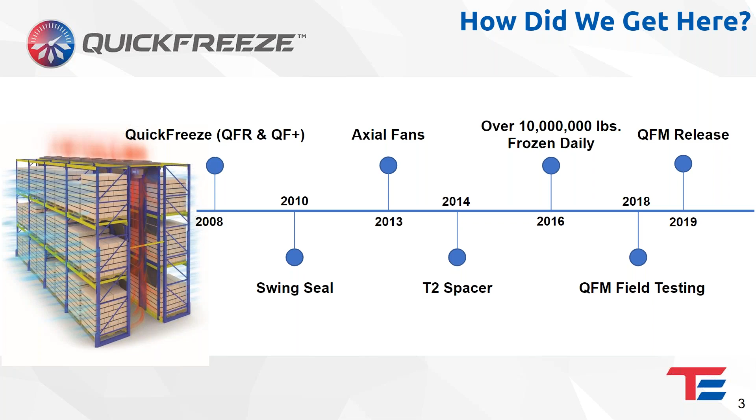So here's just a quick video graphic that shows the existing QuickFreeze offering that we've offered for the past 12 years. It shows the array of pallet heights. You can mix pallet heights in the same system, and it shows the operation of the swing seal at the top. Notice when that pallet is engaged,

it deflects that gate and blocks off any space above while providing open space for these spacers to breathe. So you can see we bring air in from the aisle. It's induced through the pallets because we have fans exhausting off the top of that plenum space. And then we can see through this wall—we just left it transparent for the video, but that would all be sealed off. So we're creating a reduced pressure plenum. And then when you push pallets up against the opening, the only pathway for the air is exclusively through the spacer area. And that's why we get the kind of performance we get with the QuickFreeze.

QuickFreeze really is universally accepted in the industry as the fastest way to freeze palletized products. So at any given temperature, this is the fastest technology available for palletized product.

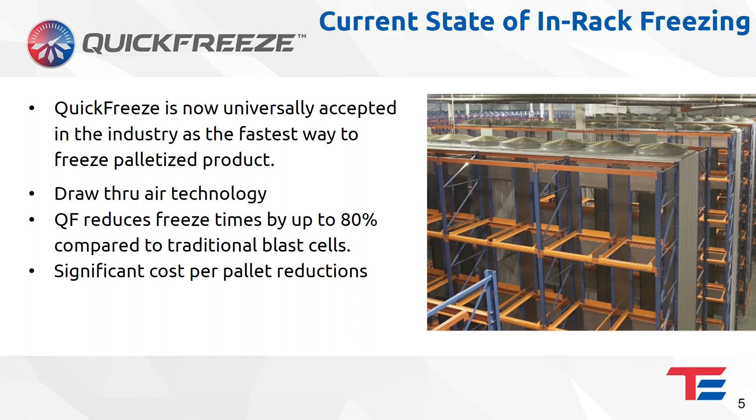Over the past 12 years, we've really learned a lot about how people utilize the systems, and we wanted to offer a new offering that helped overcome some of those challenges. We really feel like we've done a great job with our QFM offering.

Some of the things that we really wanted to address in this was number one, lead time. The time it takes to build a blast cell or build out a QuickFreeze system could take many months, up to a year, to really go from the day you decide that you want to start freezing to having that system installed and running. That can be a long lead time.

There was also, with QF Plus and with QFR, a problem of vacant pallet position, where if you don't have all of the pallet positions in a zone filled, you'll see reduced performance on the remaining pallets in the system. We knew that if we increase the CFM per pallet, it would increase the performance, but it amplifies the vacant pallet position problem. So we wanted to figure out how to address that.

Finally, when people went from blast cells to QF Plus, we saw a significant reduction in handling time, and some of our users were able to get away from batch rotation of the products, but there was still some of that on even a zone by zone basis. There was still some batch handling of product.

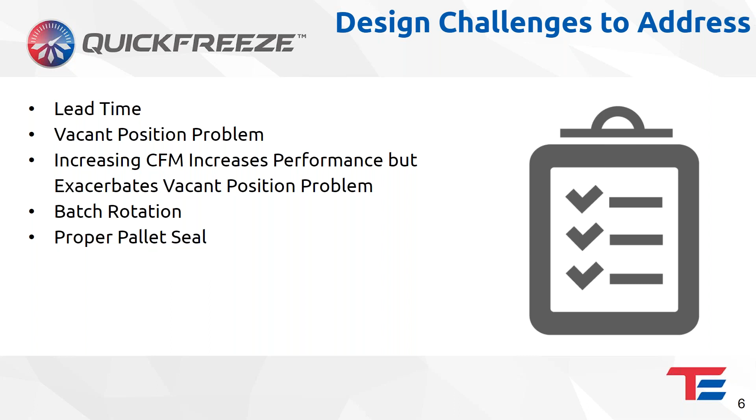Last things that, if we could get to them, we'd love to be able to add these to QFM: there really isn't a whole lot of individual pallet data when it comes to freezing. You might get some batch data or some truckload data, but really there is no individual data on a pallet of how long it was in what temperature room, anything like that.

We'd also like to see WMS integration. We had some operators on QF Plus that did a great job integrating QuickFreeze with their WMS, but we wanted to make it easier for them to do that with this new product.

Seasonal demand - we saw this quite a bit with hams and turkeys, where they would have a very high blast demand that would go away for the rest of the year. So we wanted to be able to help them address that.

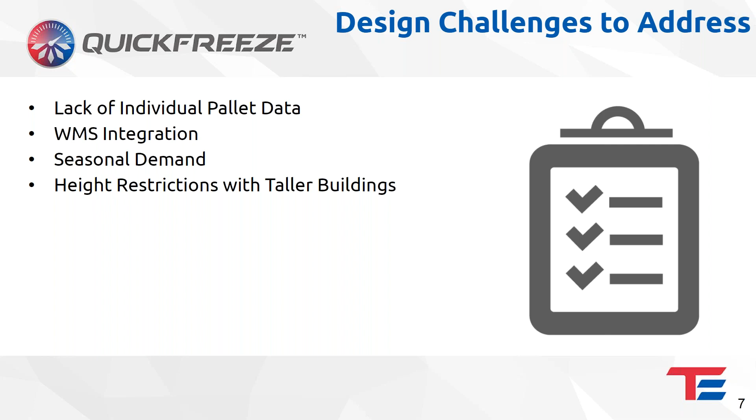And then on the horizon, we see taller and taller buildings, and being able to build systems that would work well in 100-foot tall buildings. We wanted to have something that would work well in any situation.

So that led us to this modular design. It gives us one fan and a plenum per pallet position, which enables us to tailor the performance down to the pallet.

So we have incredible CFM per layer, and we get outstanding performance. The technology itself is very proven with QF Plus, but it's really a significant bump in performance with additional airflow and all the controls that are associated with this.

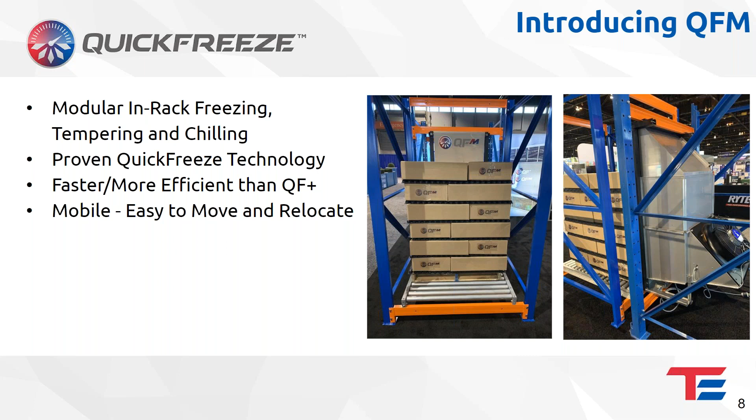And then lastly, this system is mobile. If you look at the right-hand photo, the system is fastened to your 2-deep racking arrangement. Especially the larger users, they may have demand at one plant increasing while another plant has reserve capacity. If that happened with QFM, you could put those units on a truck, transport them to the other facility, and be up and freezing in a handful of days.

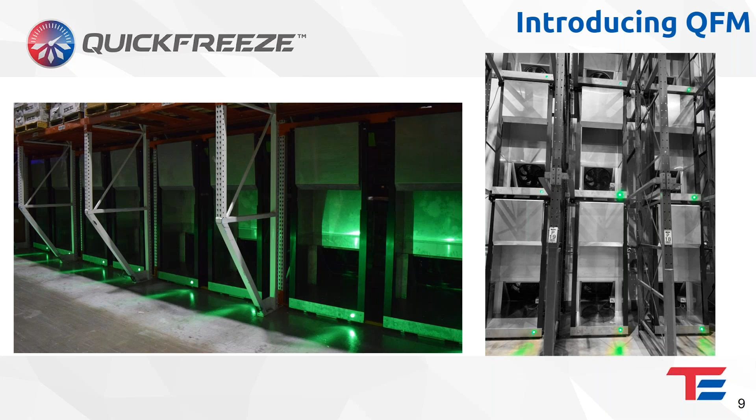Going through our wish list of what we could design around: quick lead time. We have units on the shelf in stock, ready to ship out. You can literally go less than a week lead time, as long as you have the standard 2-deep select rack with structural beams, then you can install these in less than a week. And as long as you have the refrigeration or whatever ancillary system components are there, then we're there in less than a week. And you can get this in any color as long as it's black.

It was really important to us that we had a universal design, that we weren't engineering this piece of equipment for a certain space, so that you were able to pull it, move it to a different location, have it serve all kinds of different products that you might want to blast freeze.

We also have very standard pricing that enables you to plug these into your budgets or CapEx planning, so there's no mystery there.

People are using these in new construction, retrofits, and then adding blast to existing facilities, which traditionally has been very cumbersome and costly and just hard to do. And the ROI has been very impressive in being able to reduce the CapEx spend at the beginning and the ongoing operational costs.

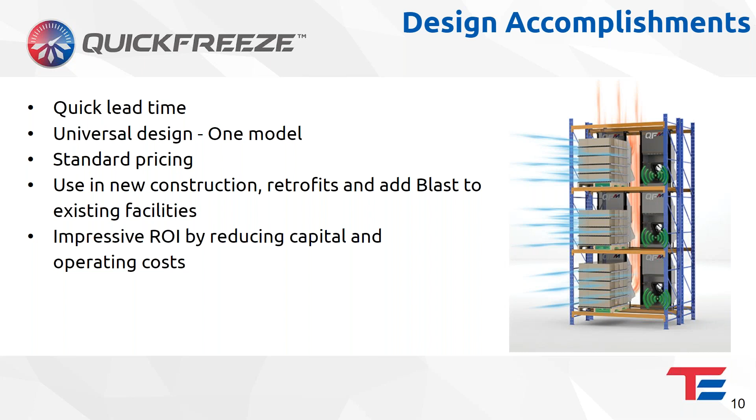So it is very design friendly. Bob mentioned a universal design. We do that by the system telescoping up and down to accommodate the rack opening, and the system can freeze pallets from 40 inches to 94 inches, which encompasses every pallet I can recall seeing in a fresh-to-freeze environment.

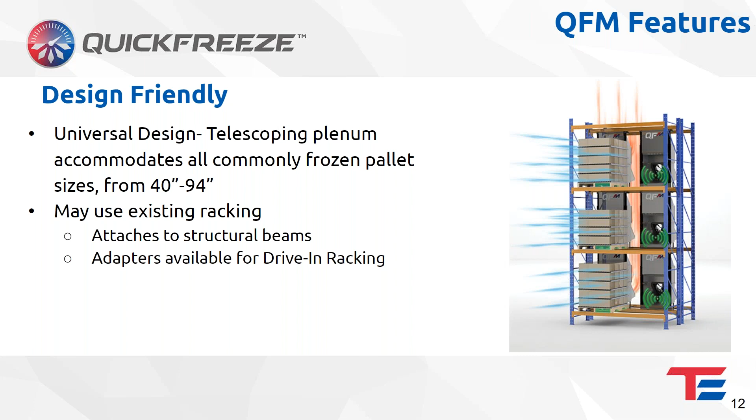So Bob mentioned the 2D structural beam rack arrangement, and we also have adapters available for drive-in racking. So it's very simple to install and remove. We have on here that it takes as little as 10 minutes - I think it's more like 6 or 7, but we'll leave it at 10.

And we're finding now the installed electrical cost is actually less than our previous system, because there's no starters or VFDs required since it's EC motors. You run a panel out to the space, and you can feed it - it's actually 20 units per circuit, and however many circuits you might have in your sub panel. So on there we said 7 circuits with 140 pallet positions.

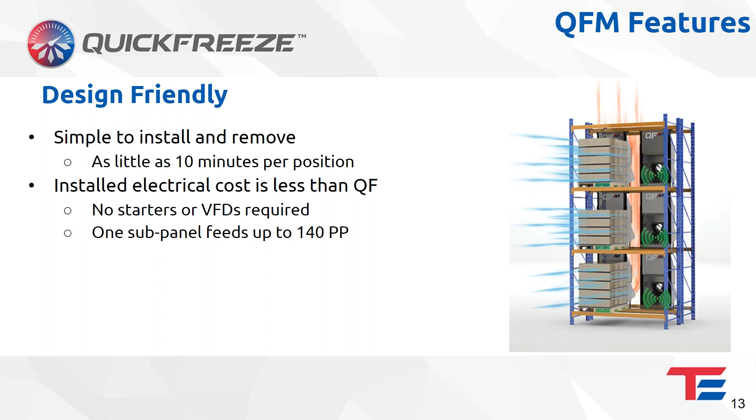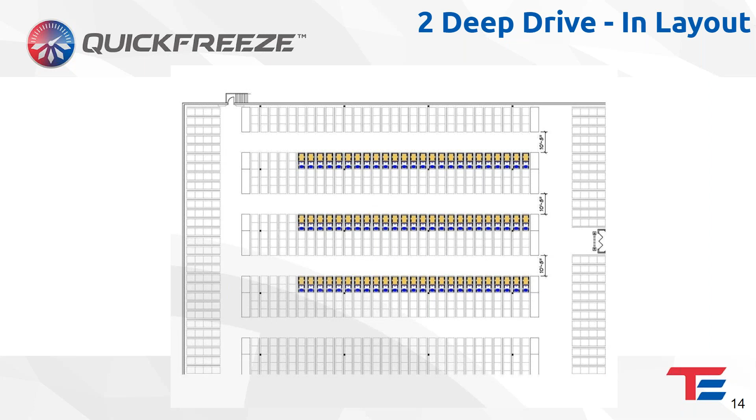Here's an example plan view layout. We have these AutoCAD blocks available, so if you want to lay these into your own facility, you can do some space planning, or we're more than happy to assist you in layouts and discuss your needs, but we're happy to share these kind of details.

So here we're jumping into something that's near and dear to both Bob and my heart - we talk speed versus efficiency. And really, because QFM delivers such high CFM per pallet, we achieve a very high velocity in the space, approximately 3 meters per second.

So that additional airflow really does help reduce freeze times, or you can keep the dwell time the same and run with a warmer room. That's really where some of the ROI dollars come from - the refrigeration system supporting your freezing operation. If it can be operated at a higher temperature, your costs per ton are significantly reduced.

And then Bob already mentioned the EC motor - that's electronically commutated - and again, it doesn't need a starter, and it has built-in speed control.

The next bullet we're really excited about is the system can freeze products so quickly that many times the facility can take advantage of off-peak freezing. So if you have a very attractive off-peak electrical rate...

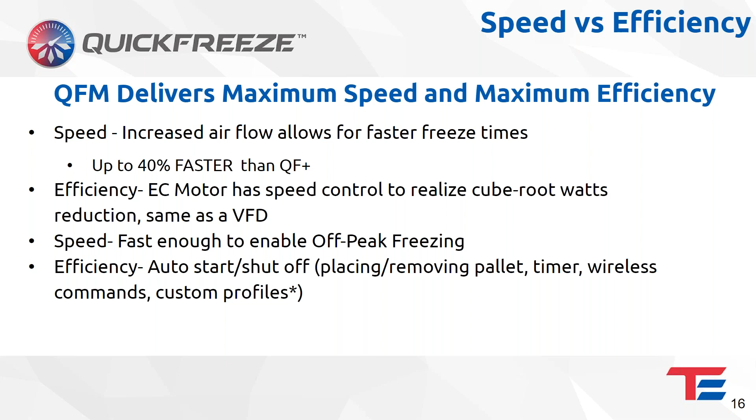Bob's more up to speed on all of the controls offerings, and I'm sure that'll come up in subsequent posts here.

We mentioned the operational friendliness, where we have the same swing seal arrangement we do on QF Plus. So we're able to accommodate a pretty wide mix of pallet heights with the same machine. The intent is to do any pallet anywhere, so operators don't have to wonder what pallet can go into what location. On the auto start, we've got a LiDAR sensor that's constantly measuring out in front of it, and when it senses a pallet has been placed in front of it, it's going to start the cycle.

The first thing it does when it starts the cycle is perform a seal test. We do the seal test first because we want to communicate with the operator that just placed the pallet and let them know if they've got a good seal or a bad seal. That seal test is completed very quickly, and it gives near immediate feedback to the operator with an LED that shines through the opening in the pallet. It also sends communication back to a dashboard that we can provide, or to your WMS.

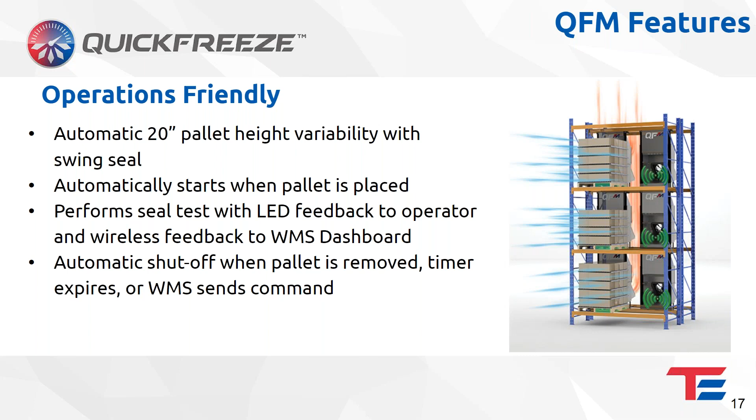When the timer on the pallet expires, the fan shuts off automatically, or if someone pulls the pallet, it shuts the fan off automatically. You can also send a pause or a shut off command from the dashboard.

One of the other design goals was to have a really no-maintenance machine. We didn't want people to have to do motor or shaft lubrication, so these motors have permanently lubricated low temperature bearings. The rest of the unit is very robust: it has a stainless steel base, plenum, and the swing seal is stainless steel. The vertical seals and telescoping members are hard coat anodized, so it's a very rugged, very durable assembly.

Safety-wise, we have both inlet and outlet fan guards, so there's no problem with the fan operating near people. We also use NEMA twist lock cords between the units - we'll talk more later about electrical, but the units are daisy chained together. We also utilize a noise reduction propeller, so there aren't any challenges with sound power from these operating in the freezer.

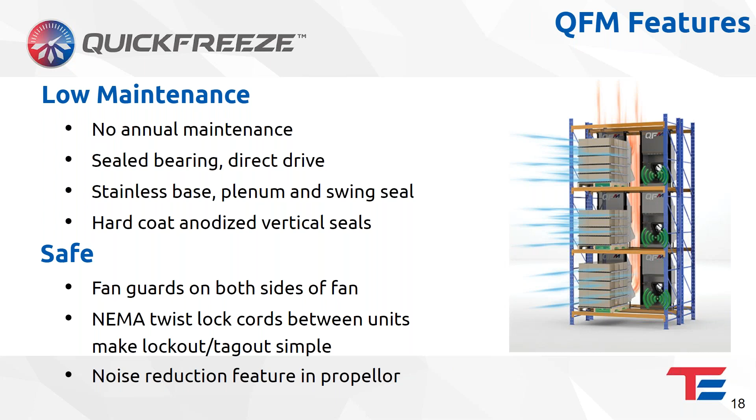It was important to us that whatever products we release and sell are reliable, and we field tested the QFM for over 24 months with no equipment failures.

It was also important to us that even though we have all of this state-of-the-art control on it, if any of the controls were to fail, the fan switches over to run full speed. We don't want a situation where they place a pallet, something goes wrong, and the fan doesn't turn on.

There's an SD card on the control box that backs up data locally, with enough storage for 60 to 70 years, so that's never going to run out, hopefully. It has low temp grease, and every component on there is rated to at least -20; most of the components are -40.

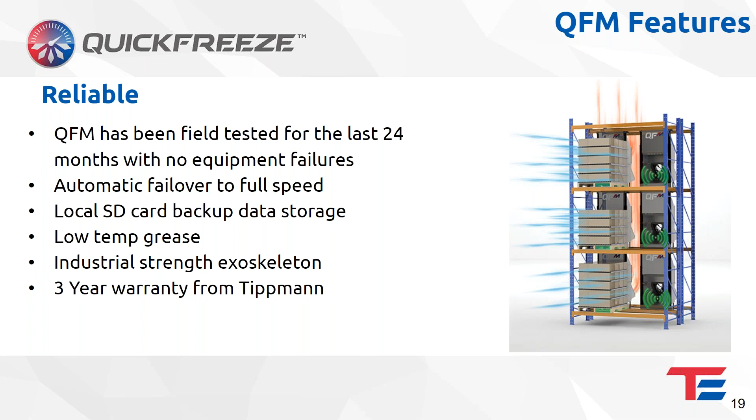It's an industrial design with an extremely strong exoskeleton design, and we warranty these units for 3 years. The warranty from the fan manufacturer is actually 1 year, but we umbrella coverage over that and warranty the entire thing for 3 years.

Now we get to talk a bit more about what they call the smart features or controls on this. I already mentioned it'll turn itself on and off whether there's a pallet in front of it or not. Each unit is a Wi-Fi device, so this is an IoT or Internet of Things device, where you need to provide wireless access to get all of the features available on these - including programmable dwell time.

The units can be controlled in a number of different ways, but the most basic way is to set a general timer for each pallet. It might be that your range of SKUs has a 24 to 36 hour freeze time, so you would set all of the units to run for 36 hours. That's the basic or introductory integration.

When you complete what we call the SKU profiling and extrapolation process, you get into variable retention time. Every SKU freezes on its own schedule, and by capturing that data, with the help of our software, we can help make decisions on when each pallet is ready. To do that, we need integration with your WMS. So it starts out as, day one, you'll have fixed retention time with every pallet set to 24, 36, or 48 hours, depending on what kind of product you freeze.

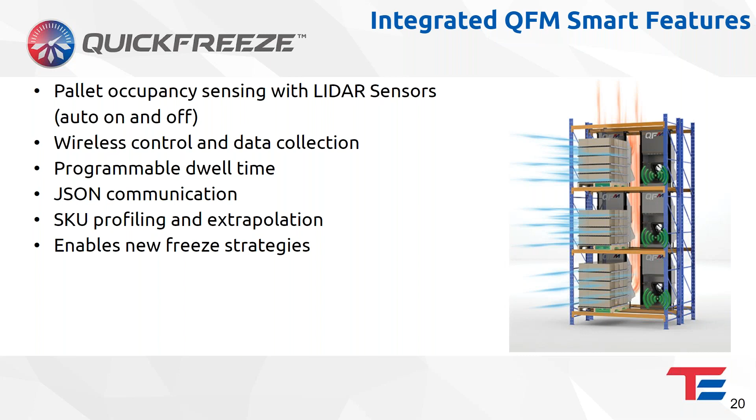So remote monitoring, we provide you with some dashboard software that you can monitor these units on the fly. You can see what the temperature is. We have some aggregation of data, so you can see trends and calculate utilization of your system, things like that.

Over-the-air updates, so these units are only going to get better over time with us being able to release firmware updates that have new features. We've got a pretty exciting new firmware update coming down the pipe right now.

Fan speed control, you can control that on the fly on an individual unit basis, or as a group, or as part of a profile. Dan talked about being able to schedule times that the units run or don't run, so that you can capture some of those utility dollar savings.

And then from there on, it's data. Temps, times, how did that pallet do on the seal test? And when you have that integration with your WMS, then you can see how your operators are performing and be able to more accurately understand what the costs are associated with blast freezing.

Yeah, the other thing I like about the dashboard is many of us in operations have dealt with challenges managing the turning of fresh to freeze product. So many people use a chalkboard or whiteboard in the operations office, and the dashboard that Bob's talking about, one of the most attractive or popular screens is the operations screen, where it summarizes the status of all the machines.

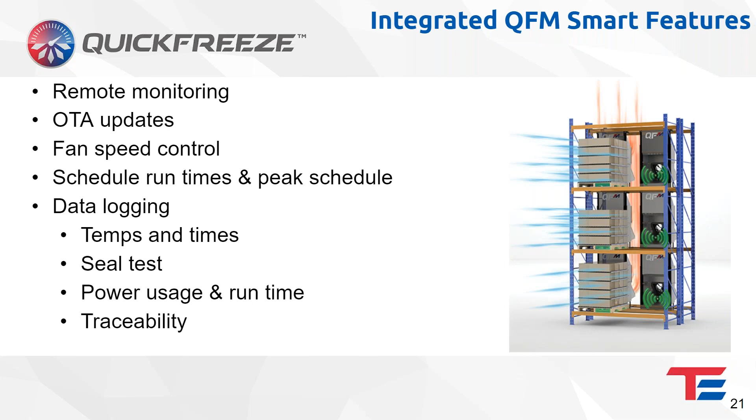Here's a quick explanation of kind of the nuts and bolts of the machine. So from the left, it shows the unit telescoped up to its maximum beam to beam height. And then you see there's at the very top, it's showing a connection to a horizontal rack beam, and that detail in the upper right shows the clamp assembly grabbing that rack beam. And then if you look down at the bottom, there's that B detail that's down below, showing how the unit sits and is gripped with the bottom fixture.

And the next graphic is the unit telescoped downward, and it shows the width of the unit. And then there's on the right kind of the isometric view showing the major components, and then the side view. So there's just pretty good explanation, and it helps people first of all understand what the unit looks like, how the telescoping works, and how it can fit into their operation.

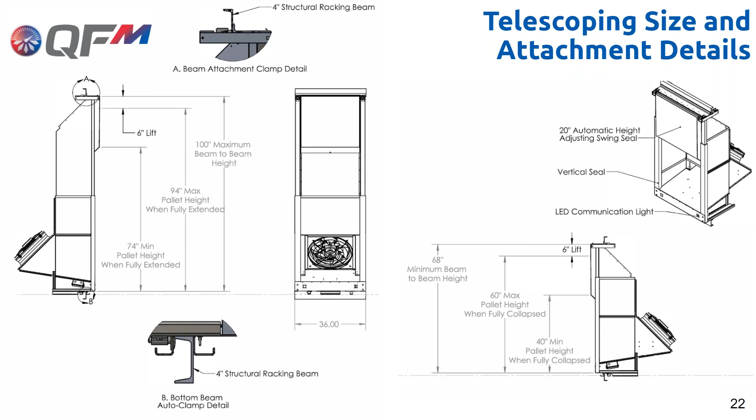So talking electrical, these units are 480 volt, 3-phase, 60 hertz. They consume 600 watts, and you daisy chain them together with the NEMA twist lock cords and caps. Those twist lock cords are very easy to lock out, tag out, as they have on the ground plug, they have a place where you can place a lock, and then you can put up to 20 of these units on a 25 amp circuit.

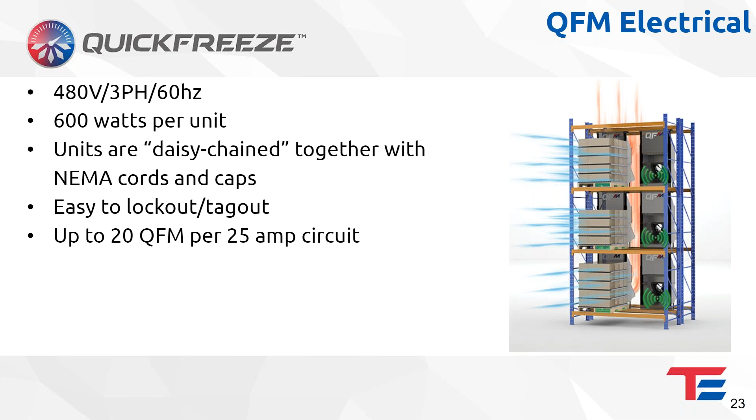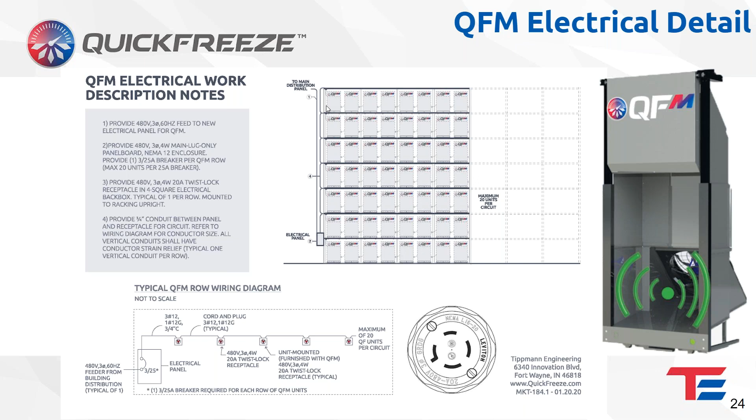Here's our electrical detail page that we can send you as a PDF after the webinar, but it illustrates the daisy chaining of the units together. And if you had a sub panel, you would have an outlet at each level that the first unit would plug into, and from there they daisy chain across, up to 20 per row.

So again, the racking recommendations, we have two options. Number one, 2 deep select rack with structural beams like shown in the graphic on the right. And then again, we can interface with drive-in rails.

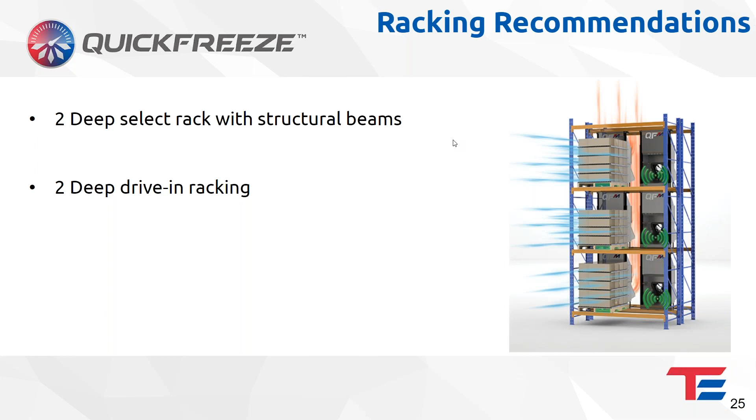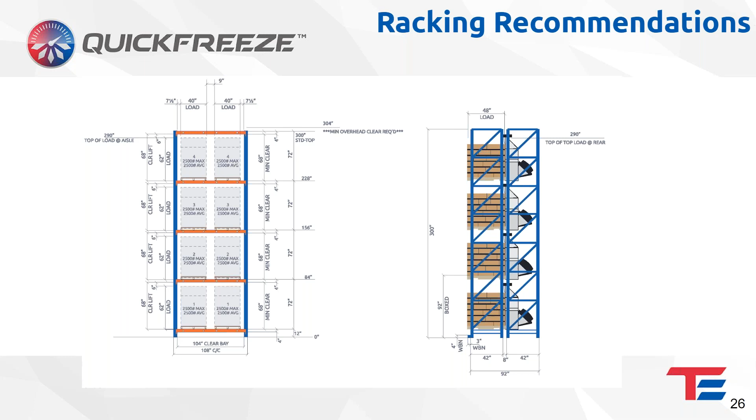So we do include some information, and these graphics are available to share for a specific project. We can help you with clearances, and we have another page with racking details that shows suggested capacities and sizes, and it really just helps take the mystery out of where the units can go and fit and attach.

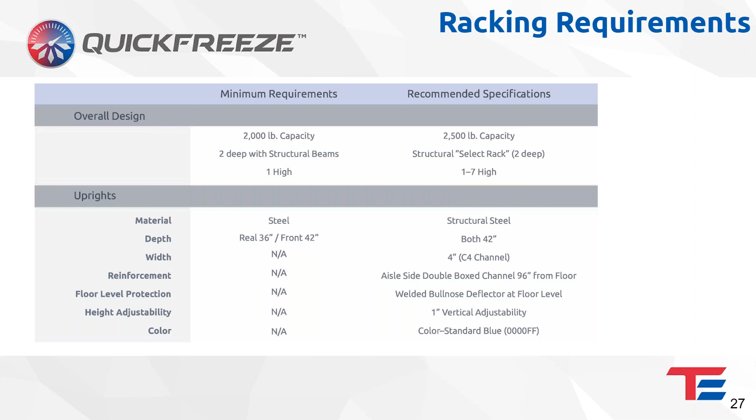So here's a quick 2-page racking requirement list. We're more than happy to share all these details, but we like to see good quality structural steel racking systems utilized. Number one, obviously to carry the weight of your products, but secondly, the throughput and the number of turns you get through a freezing location dwarf your storage locations.

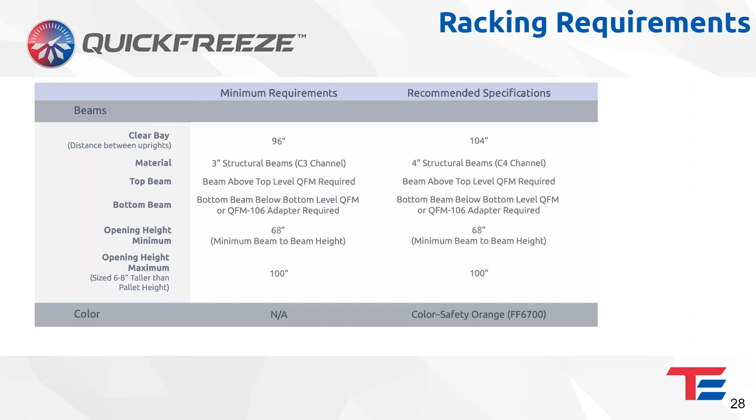So if you're going to spend money on durability and bullnose deflectors and double boxing, all the things that can increase the ruggedness of your racking system, your freezing area is the place to invest those dollars.

All right, so when we're talking about installing QFM in new construction or new additions to your existing building, you would provide the racking. You can get the same racking as you would get throughout the rest of your warehouse. You provide power and Wi-Fi, and then depending on the size of your order, we have a few hundred here in stock.

But if it's significantly more than that, then we need a little bit of lead time to manufacture those and get them over to you. The best part is they install overnight without any interference to the construction or operations. We're not in your way. It's literally 5-minute installs on these units.

And anytime you're planning a new freezer, you should include additional capacity for future freezing. Out of everything it takes to have a successful blast operation, refrigeration equipment takes the most time and really costs significantly more if you buy that equipment further down the line. So if you size your vessels and some of your piping, just do a little bit of master planning on the refrigeration system, and that'll pay dividends in the future.

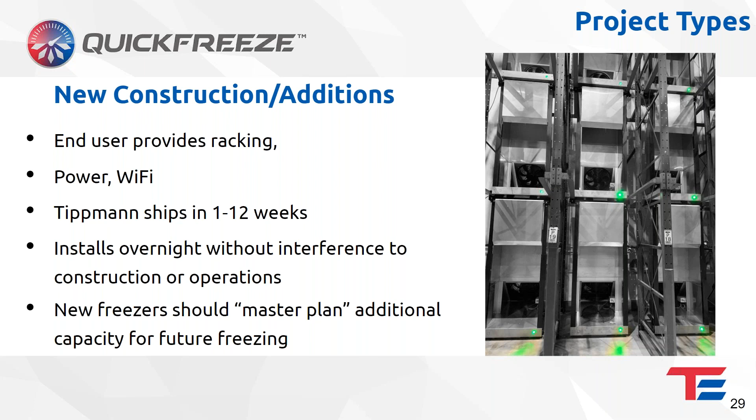Absolutely. We do see a lot of retrofit because of the ability to add freezing into a facility that has not previously offered freezing. We're a great fit for a retrofit. So if you need to expand your current freezing capabilities, or you want to start offering freezing services at a location that hasn't previously, this is a great solution.

Bob did mention the infrastructure on the refrigeration. We've had multiple customers be able to eliminate their low temp suction. They were able to basically increase the low temp house suction, which paid big dividends, number one, on capacity, because their existing equipment was able to perform at a much higher refrigeration capacity at a lower horsepower per ton. And it expanded their ability to take on additional freezing. In these installations, the only thing they had to add was supplemental condenser capacity.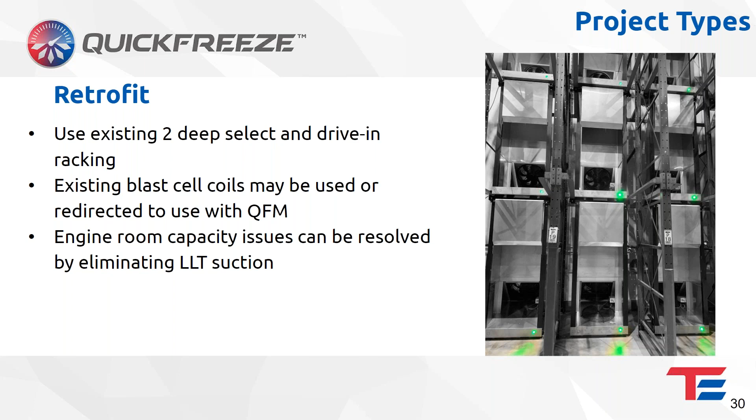We kind of already mentioned, when you're adding blast to an existing facility, I don't know nationally what percentage of facilities offer blast freezing, but many of the 3PL freezer operations do not offer freezing. But the ones that do have additional refrigeration capacity, this is a great way to dip your toe into offering freezing services at very low CapEx costs.

We do tell people we'd like to see a minimum of 5 degrees temperature difference between the target temp. So for most product, you're looking for a 0 degree core temp. So if your freezer is -5 or below, we can turn most products in 48 hours or less with this system. And Bob already mentioned incredibly fast installation.

These literally go in during new construction. We can easily get in and install these during pull down. So we're not having to do a lot of gyrations with schedule around other people setting rack or working on doors or any of the things you see near the end of a construction project. We can be in during pull down, getting these systems installed and ready to go by the time you're at temp.

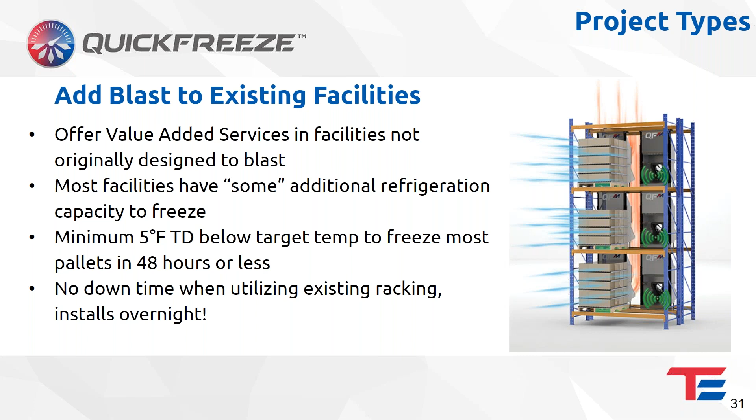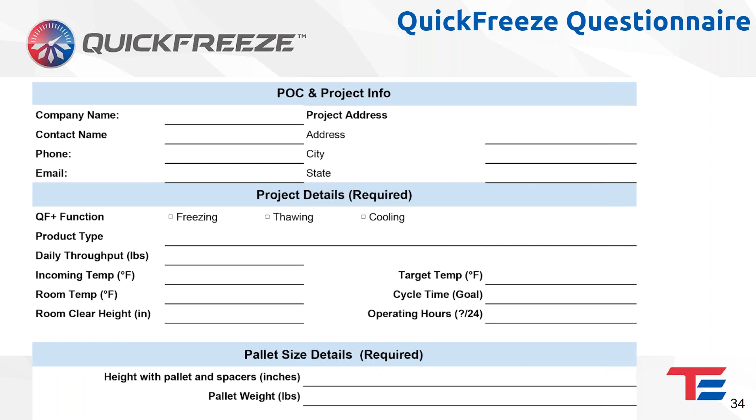So here's some ROI tools we offer. The first thing we always do is look at the size of the operation you're contemplating. We need to get an idea, and when we look at initial costs, we have to size the system. We really need to know what are we doing—are we freezing, thawing, cooling—and what are we working with. We need to know the product type, the throughput in pounds per day, all these details, so we can size the system. So there's a questionnaire that gets sent out.

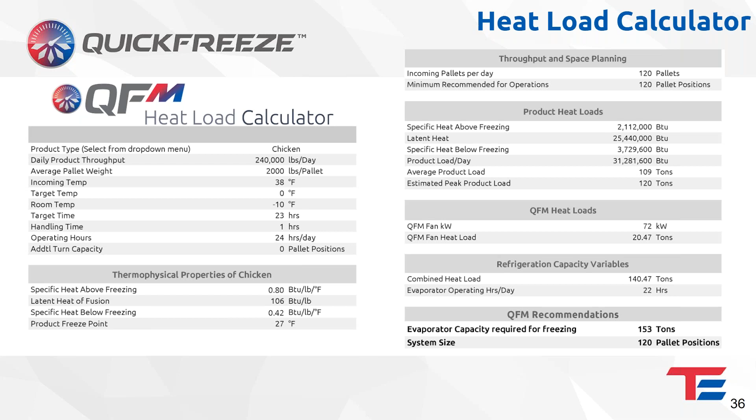When this gets returned, we can turn the crank and determine not only how many QFM systems we're projecting you're going to need, but we'll also share the heat load calculator that projects the recommended refrigeration support that area is going to need.

So not only is your installed cost of your refrigeration system often significantly less costly, but our ongoing costs, our utility costs and handling costs are significantly reduced. So we provide the tools to be able to make as informed a decision as possible.

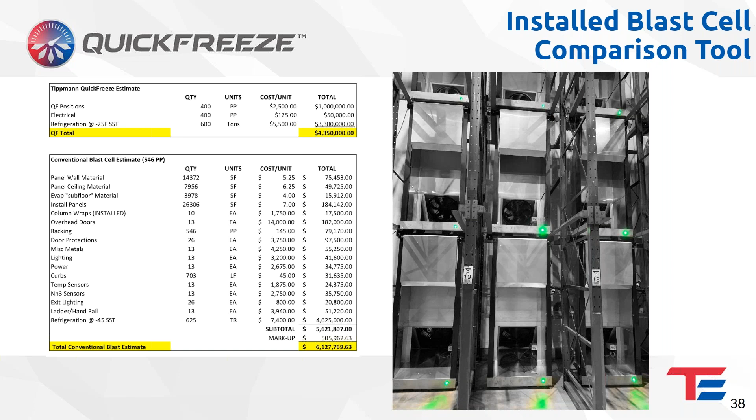The next part is really how much am I spending to freeze each pallet. There's utility costs associated with the fan power, your evaporators, and the rest of your refrigeration system. Secondly, there's handling cost. Notice all of our freezing systems are a single deep arrangement, so the handling—the number of pallets per hour an operator can perform—are significantly better for the single deep versus the conventional blast cell.

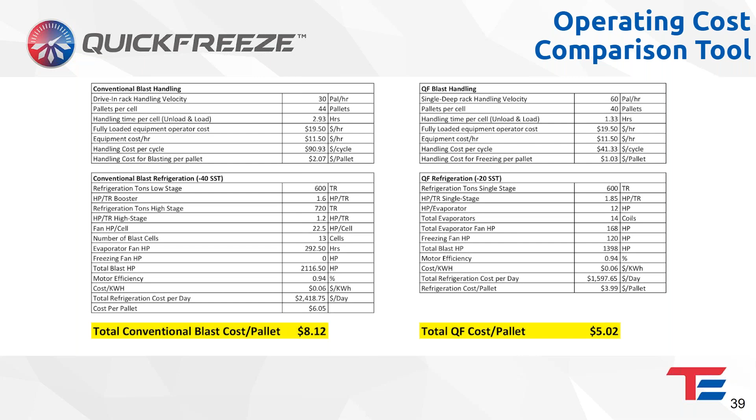In a conventional blast cell, the operator is having to navigate several pallets deep in a drive-in arrangement. So we have an inherent advantage on the refrigeration because we're operating at a higher temperature for the same turn time, and we have a significant advantage on the handling. It really does give the end user a significant advantage when they're competing for fresh to freeze work, and it helps them determine what their cost per pallet or per hundredweight happens to be.

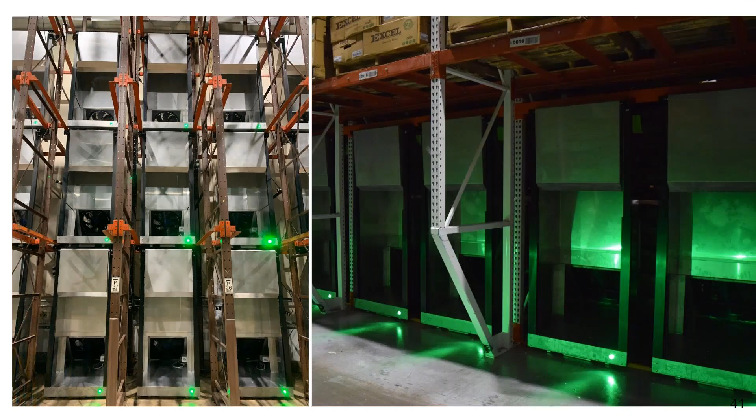Here again is one of the install photos. This happens to be drive-in racking, and again there's that floor system. Notice the green LED at the base there—that's one of the status LEDs, and that's basically telling us that all those green lights are available, ready to freeze product.

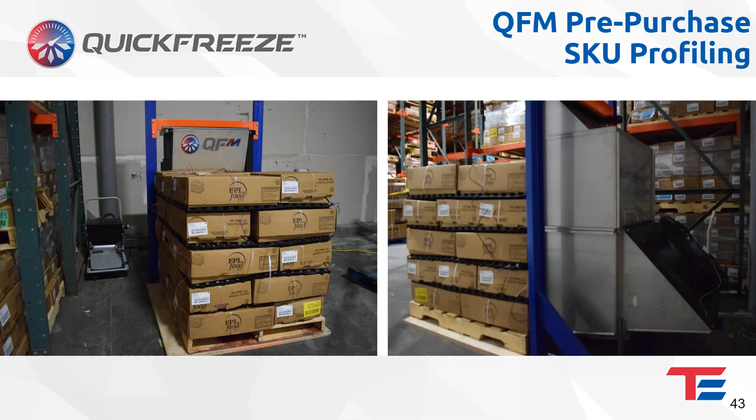You want to talk about? Yeah, so...

We also have units that we can send you so that you can do some profiling before you invest in a larger system. It's the same unit, not any different than what you'd get in the full system, so you get exactly the same performance. A lot of people find it helpful to see their product freeze in their facility, and if they have their own quality assurance group, they can deploy their own time, temperature, data acquisition equipment and get their own results. There's just no guessing at that point.

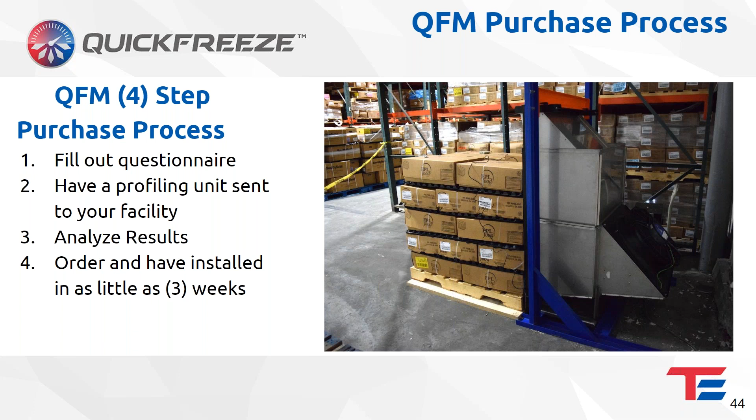We can talk you through filling out that questionnaire, get a unit there, and then the reporting and test data used to be a cumbersome process, but now it's all built into the QFM. There's a probe we can provide that plugs into the control box and logs the air data and the product temperature data, putting it on a graph together. So it's literally a couple of clicks and you have your report on the performance of the freezing.

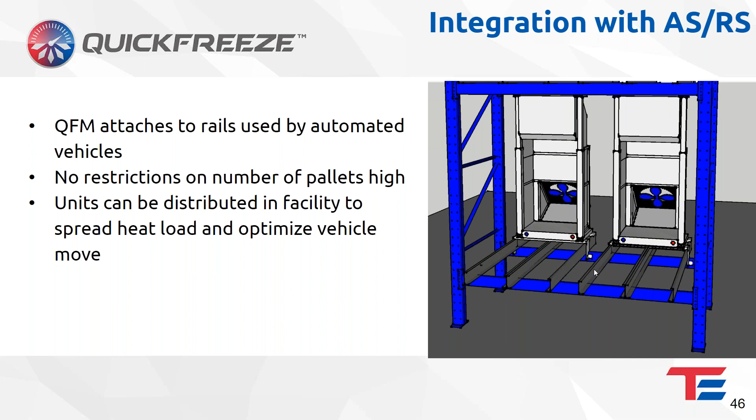Kind of looking forward, we see the increase in ASRS, and here's a mock-up of how QFM can be integrated into an ASRS. It can attach directly to the rails, and there's no restriction on number of pallets high, whereas on our older system with the shared plenum, we were reaching maximum height at 40, 50 feet. Some of these buildings are going 80 to 100 feet, and you really need something like the QFM to be able to do that.

This is where we have fun - we like to talk about what's next. I mentioned that over-the-air updates provide us with the ability to improve the QFM in the future at no additional cost, and we're getting ready to share our latest firmware here in the next couple of weeks. We'll publish the new features that are available on that.

We've built some profiling units that have additional sensing equipment that give you more data, which we can then extrapolate for future runs of the same SKU. Like we said, custom profiles, off-peak, you can interlock with other systems - really the only thing that's prohibitive in the profile is your imagination with those profiles. And then auto sense termination is kind of our white whale at this point that we're chasing. We have some promising data, but nothing we're ready to put out into the wild.

Right now, if you want to turn off the QFM automatically, you plug one of these probes into the unit and into your product, and then you can tell it to shut off at 0 degrees and it'll shut off. The other automatic termination is that once the SKU has been profiled, that dwell time can be stored in the warehouse management system, which can then send the QFM a termination signal. That's available today, but we really are hoping the QFM can do auto termination with all exclusively onboard items.

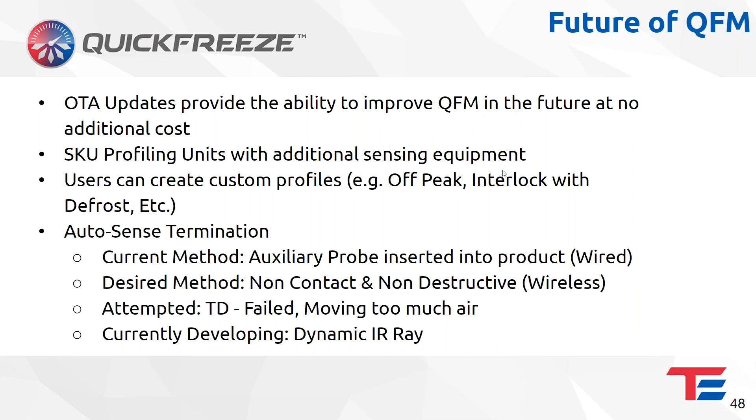And then it's - I don't know, do we have any of the charts on here? No, okay. So yeah, we've been playing with it, it says dynamic IR ray, which sounds way more futuristic, but it's a dynamic IR array, and we're having fun with that. When we have something solid to share with you, we'll be sure to publish that.